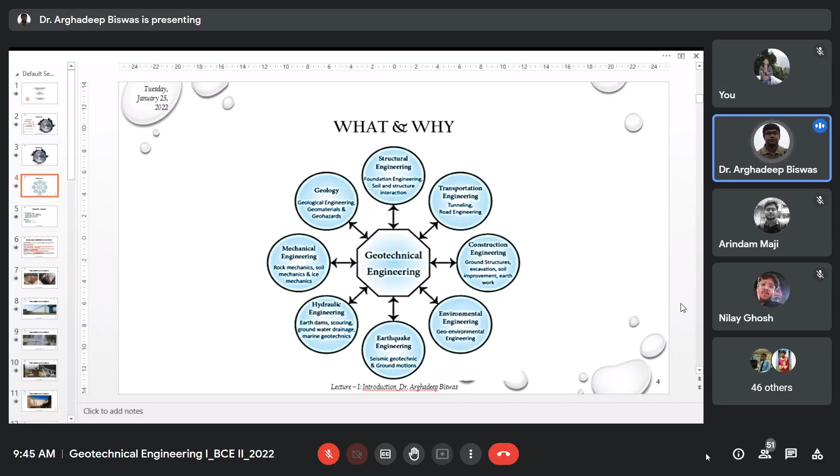From modern soil mechanics onwards, people actually explored geotechnical engineering, soil mechanics, foundation engineering or rock mechanics, whatever you call it. From 1910 onwards, people have been rigorously working with geotechnical engineering as a whole. They have explored geotechnical engineering from the bottommost point of its origin to the topmost structure.

Okay, then comes geotechnical engineering, when people combined soil mechanics and rock mechanics, around 1930. Before that, in the classical soil mechanics portion, people analyzed geotechnical engineering, soil mechanics, and rock mechanics. They have more of these things; soil mechanics was more conceptualized like solid mechanics as well as fluid mechanics.

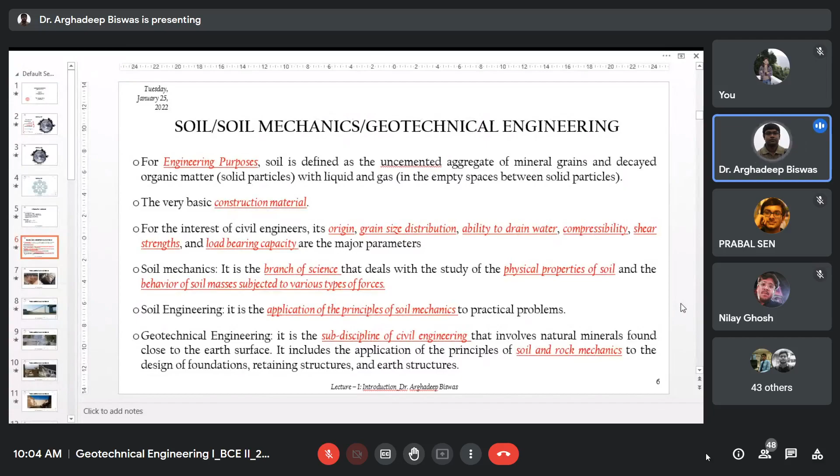Okay. Sir, can we consider a dam as a retaining structure? Of course, yes, it is. A dam is of course a retaining structure. Okay, sir. So this is all about the basics of soil science, basics of geotechnical engineering, what we will be dealing with in the domain that is defined here.

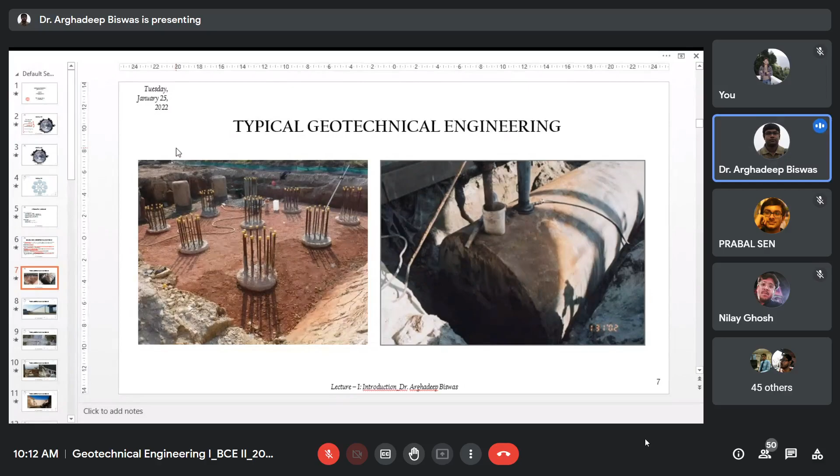So anyhow, this is a typical foundation, and this foundation is very difficult to assess: its expansion, its compressibility, and moreover ensuring a uniform level throughout the design life, right? So this is typical geotechnical engineering that you will be facing.

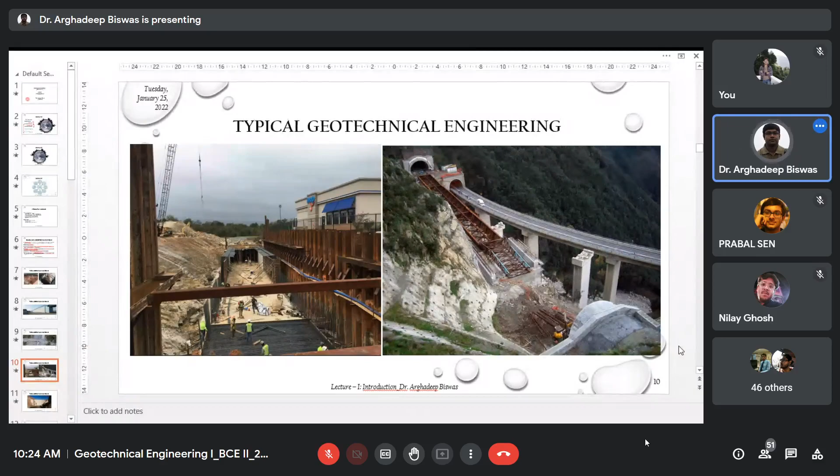Geotechnical engineering is very difficult to estimate in terms of behavior. There is another kind of thing to discuss.

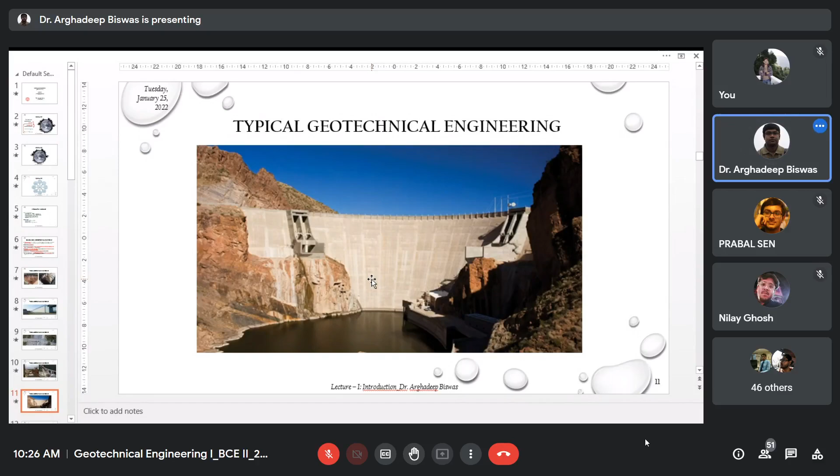These are very unique engineering concepts, unique geotechnical. It's not entirely geotechnical, but it's a unique civil engineering concept. This is why geotechnical engineering is nowadays very important and in focus, because of its uncertainty, because it's difficult to estimate or assess its behavior. The more difficult the things are, the more people are interested in it. Therefore, nowadays geotechnical engineering has become a prime specialization in the civil engineering domain, because of its uncertainty.

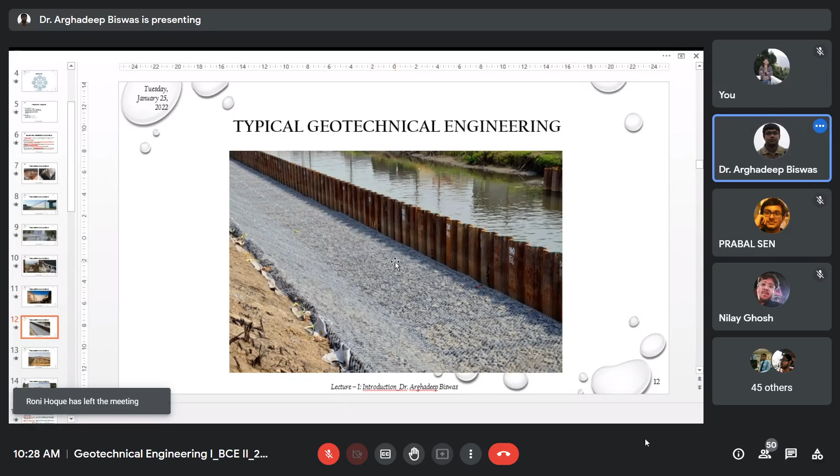Ecology exists there, it will not be disturbed. Okay, fine. Okay, this is another one.

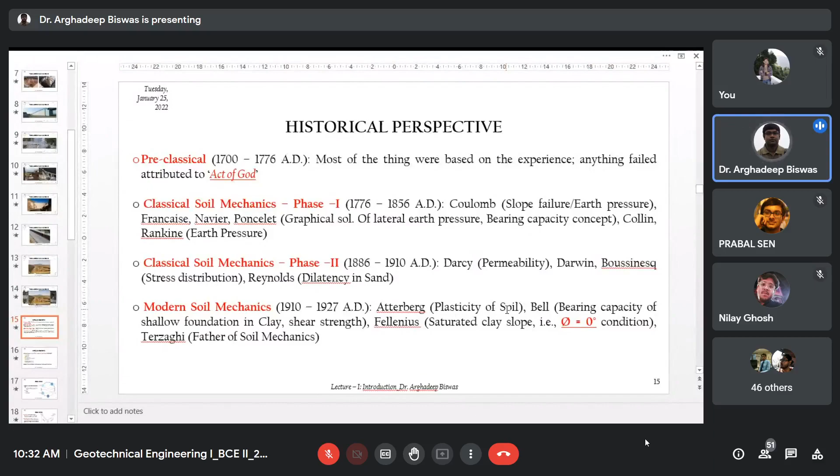But the thing you will learn afterwards — before coming to Terzaghi's theory, this person Atterberg actually proposed the plasticity concept of soil, the consistency or degree of firmness of soil, which I will explain later. Unless that concept is introduced, Terzaghi's theory is difficult to assess. So, entirely my personal view — if Terzaghi is called father of soil mechanics, Atterberg should be called grandfather of soil mechanics, because the initiation was made by Atterberg himself.

Karl Terzaghi is the founder of ISSMFE, an international body — International Society of Soil Mechanics and Foundation Engineering — later named International Society of Soil Mechanics and Geotechnical Engineering. It's an international body, like our Indian Geotechnical Society, a geotechnical society of several countries, which develops different standards and organizes conferences, lectures, all those things.

So what are the things Karl Terzaghi has proposed, touched, postulated? The concept of effective stress, shear strength, cone penetrometer, all those things. I just forgot the country he belongs to, but the setup he made almost 100 years back is still working, and the results it produces are still far better than some of our modern equipment.

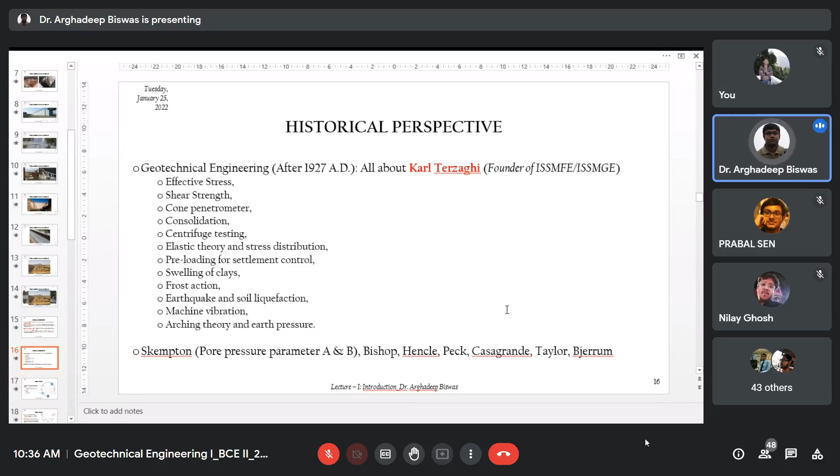So you will have their contribution. You will get their contribution in sequential manner. And actually, at present, whatever we are taking as our research topics in geotechnical engineering, the topics were actually defined and initiated by these people. We are just altering a few of the parameters and we are taking the modified response. But the basic thing was defined by these people only. Okay.

In general, soils are formed by weathering of rocks. The physical properties of soil are dictated primarily by the minerals that constitute the soil particles. Like us, our properties, our nature, our behavior is dictated by the behavior of our parents, our father, mother, and sisters. So this is just like that. The physical properties of soil are dictated primarily by the mineral composition of the soil particles or the rock from which it is formed or derived.

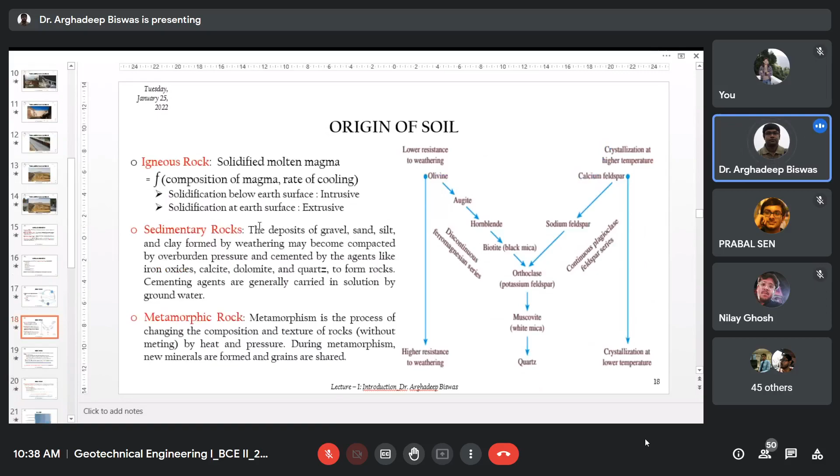So I am not going into the detail of this weathering process. You just go through your 10th or 12th standard geography book. You can have the details there. But I am just making a brief presentation for that: weathering, rock formation, soil formation, all those things. Please go through the book carefully. This part I am not going into in detail because time may not permit. If it permits later on after completion, then I will return back to it.

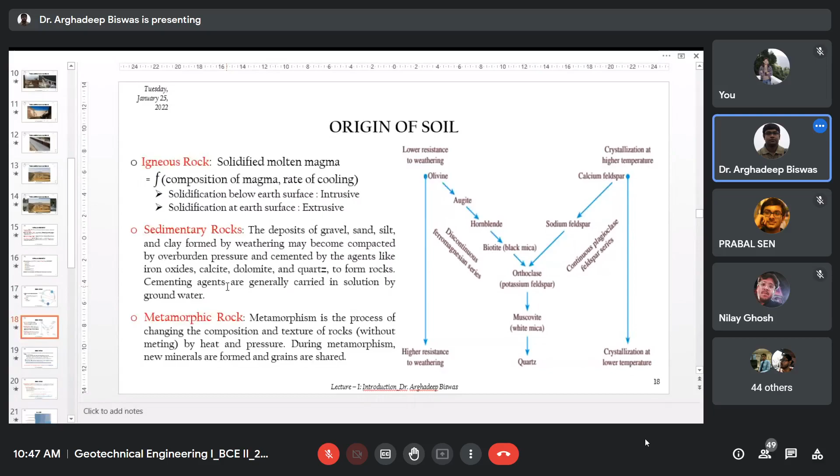Okay. Now, weathering: what is weathering? It is a process of breaking down rocks into smaller particles by mechanical and chemical processes, right? Probably all of you know the weathering process. It could be mechanical or physical, or it could be chemical weathering. Mechanical weathering is caused by the simultaneous cyclic process of expansion and contraction of rocks, which breaks down big giant rocks into smaller parts.

Then seepage of water into the pores and existing cracks in the rock: when it solidifies into ice, it expands and breaks down the rocks. Others include glacial ice, wind, running water streams, all the mechanical or physical forces that break down the rocks. Chemical weathering is caused by decomposed, leaching chemicals formed by the decomposition of organic matter, which react with minerals of rock. These oxides are formed, which are less stable, and the rocks are broken.

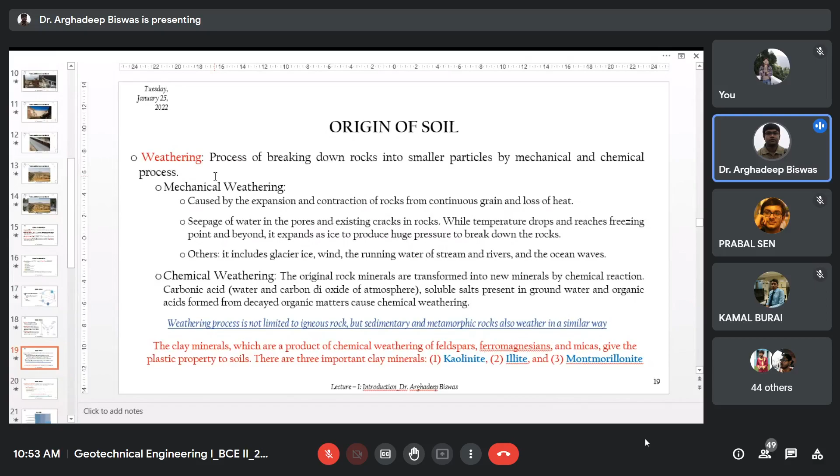So this is so much. It has so much appetite for water. So this is a very unique type of material. It's industry made. You can even ask industries, giving the composition. So they will prepare that type of bentonite and they will supply you for your particular work.

Okay. So soil can be two types with respect to the weathering process. It can be transported soil or it can be residual soil. Transported soil means the weathered rock, the product of any decomposed rock, that will be transported by natural media like wind, water, ice, and deposited somewhere else than its origin. That type of soil, formed in another place as compared to its origin, will be called transported soil.

Now those soils which are weathered and deposited at their own place will be called residual soil, right? So two types of soils are there. One is residual soil, which will be deposited at the same place as its parent rock, and another is transported soil, which will be deposited and formed at a different place, transported by natural agents like ice, water, wind, gravity, and formed at a place other than its own place.